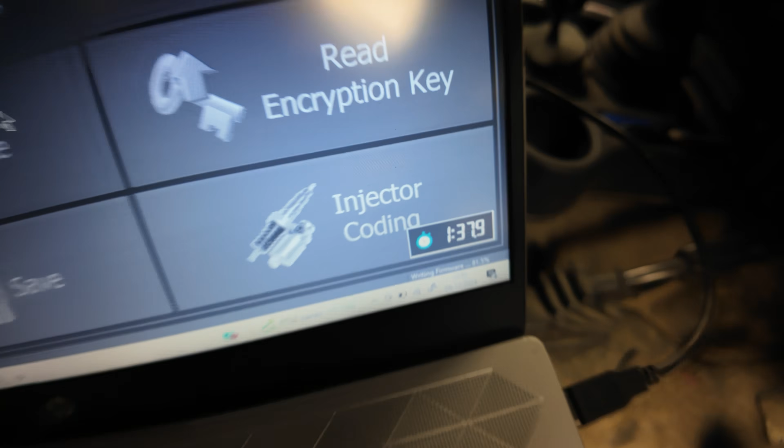Shuts like a Defender. Windy windows.

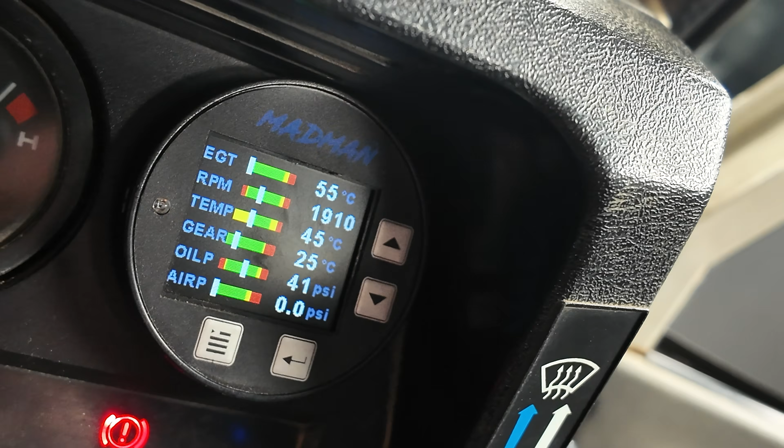Works quite well, but not quite as well as an Alive Power Flash.

So let's have a look at the vehicle, just having a look for some codes. Nothing in there that's going to give us any bother.

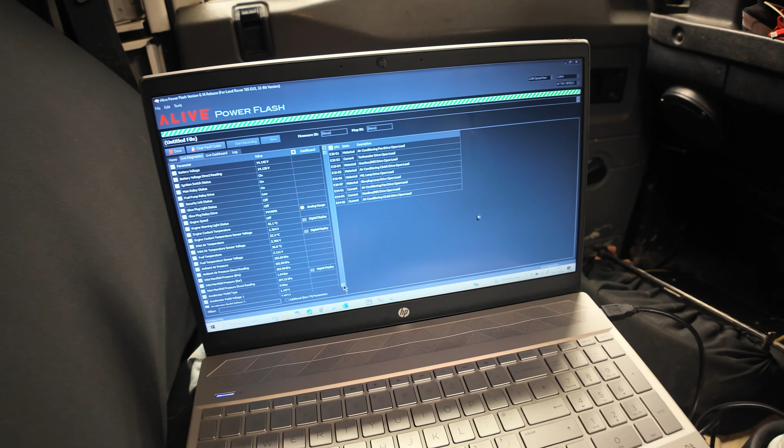What data are we going to look at today? Engine RPM, coolant, air inlet, manifold. I've already checked this - the map sensor's good, so we're just going to look at that data.

So we'll go straight to the live dashboard, and there we are. Look.

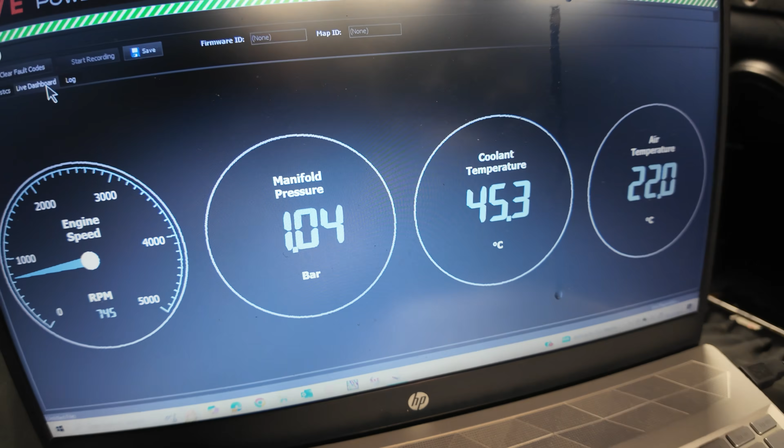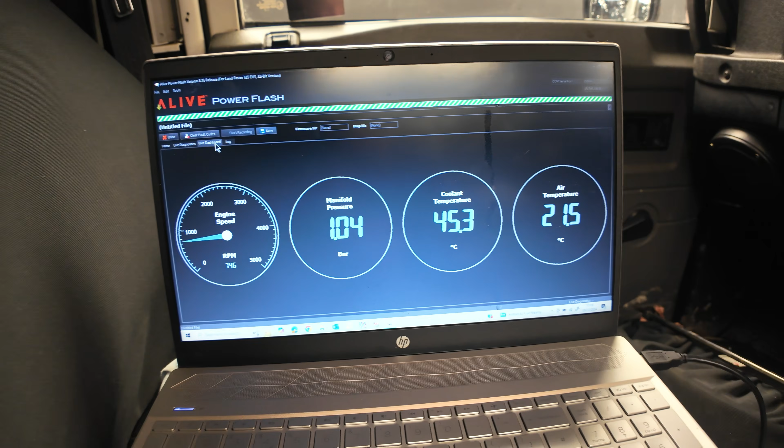I'll put some temperature into this one because it's a little bit cold at the minute, and then we'll get on with some power testing. We'll see what it makes with the old stage one done about 3 years ago. Yeah, never went on the dyno back then, but we're upgrading today - we're going for some more power. So let's see what we can do.

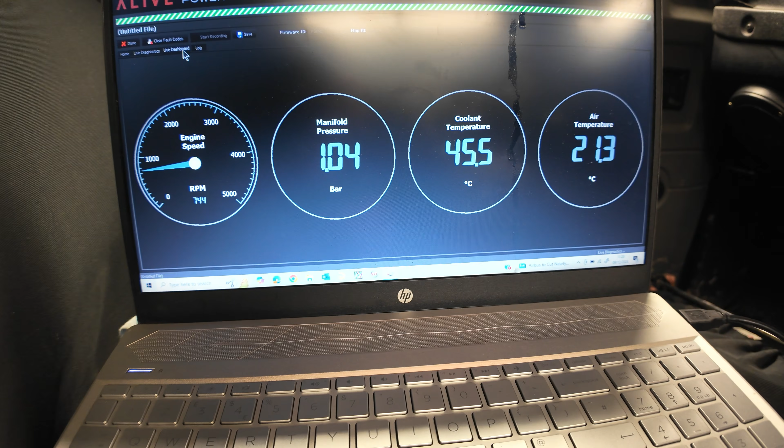Just take the brakes off the dyno, have a look at the wheels, make sure they turn.

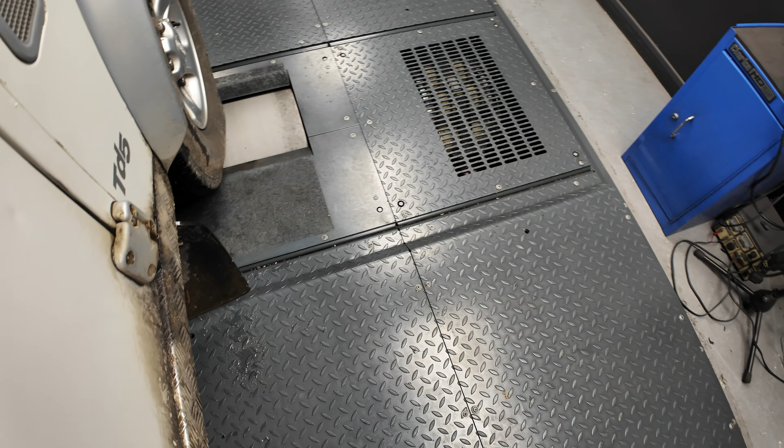I do like to check the straps after the vehicle's moved a little bit. Yeah, this back one here wants a little bit of a tightening.

Feels like a stage one.

It's actually quite smooth on the dyno, this one. Quite smooth, yes. Look, almost no vibration from the steering wheel. Steering wheel's not straight, but yeah.

Right, so we're up to temperature now with the engine and we're ready to do a power test. So we've got the fan on, fan's going, so let's see what this can do.

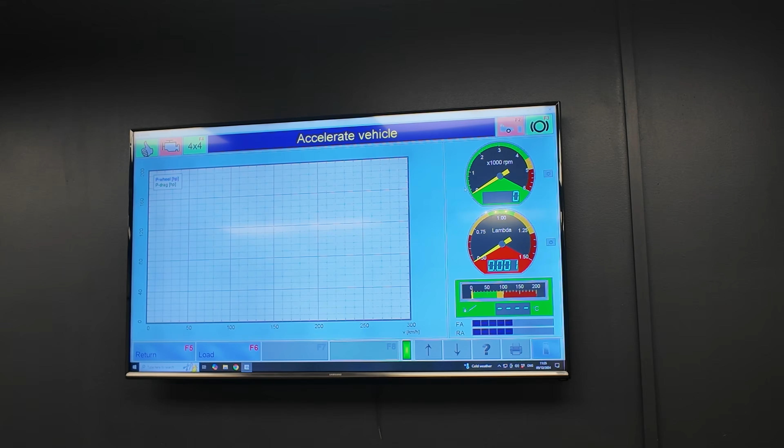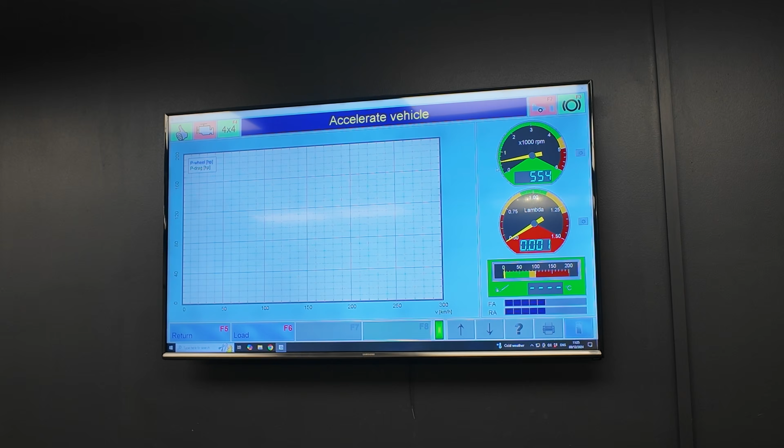So remembering it's stage one mapping, but it's got the mods for stage 3, so let's see what it'll do. Off we go.

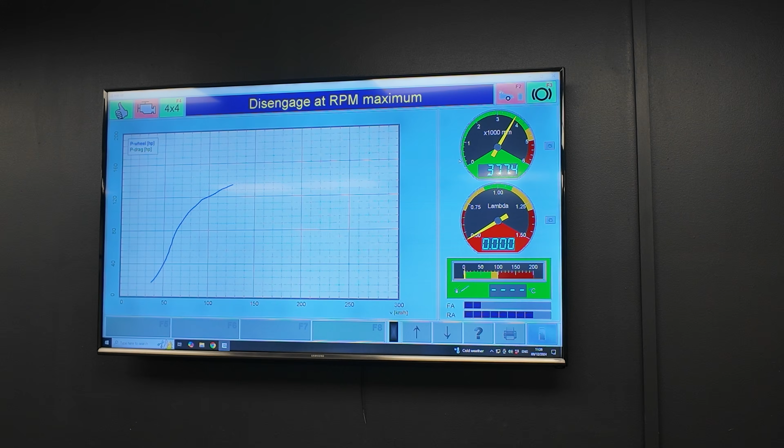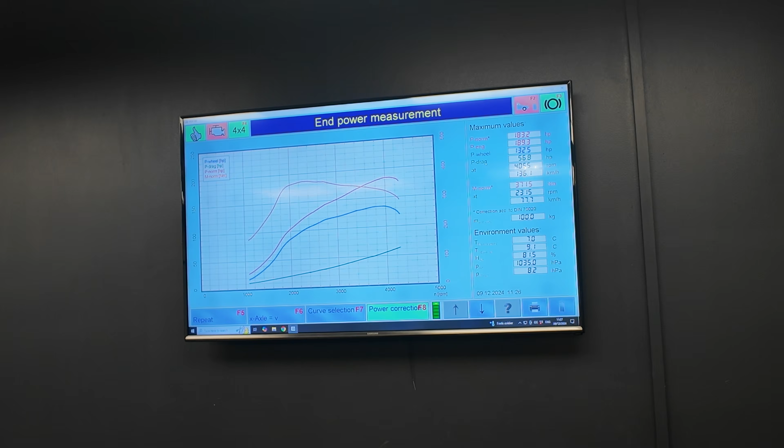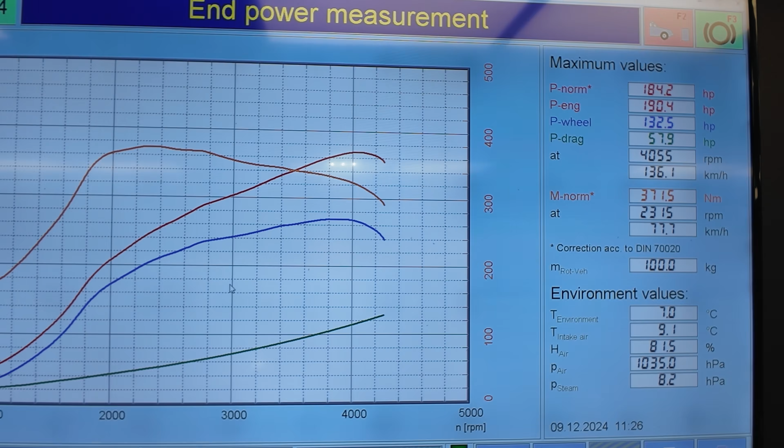So, oh, we need to make a correction to the rundown. So there's your stage 1. Well, that is a very strong stage 1. Intercooler obviously doing an awful lot of the lifting there. Definitely doing a lot of the lifting.

So we'll press on with some more mapping. I've got a feeling this is going to be a very strong result when we are done on a stock turbo.

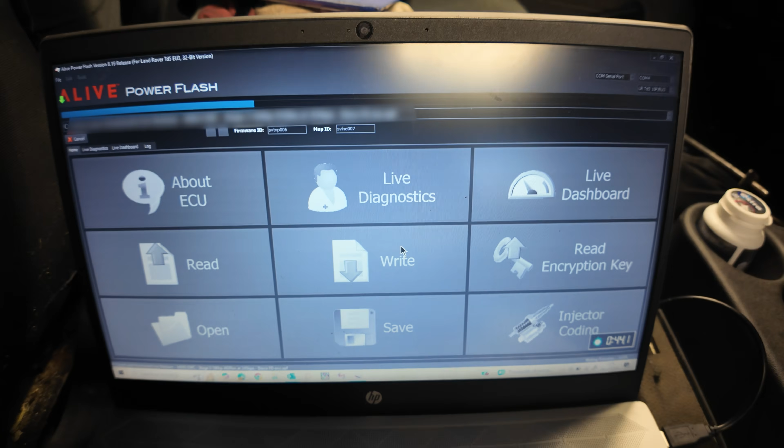Right, so we have the map going on now, and also got something else here. What's this? Yeah, a new Alive tuning product to work alongside the Alive Power Flash. Get this map flashed and we'll show you a bit more about this.

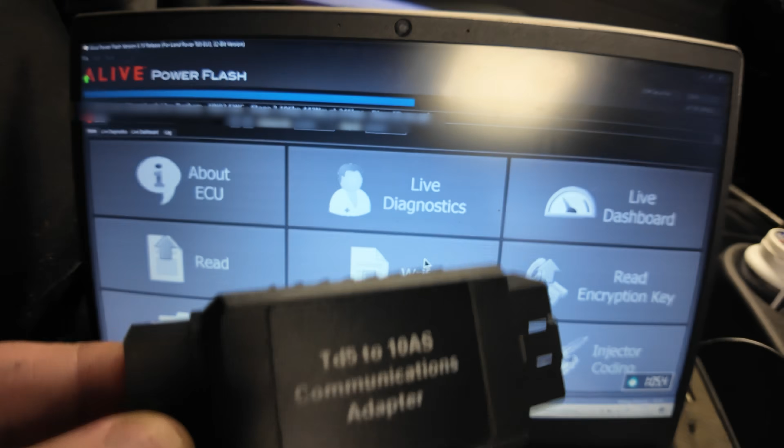Right, so Power Flash is already plugged in. What we would do from here is try and look at the screen without getting a reflection. Yes, so...

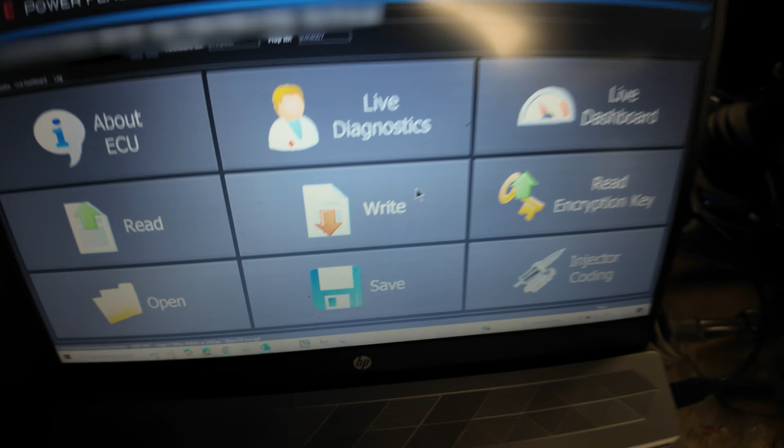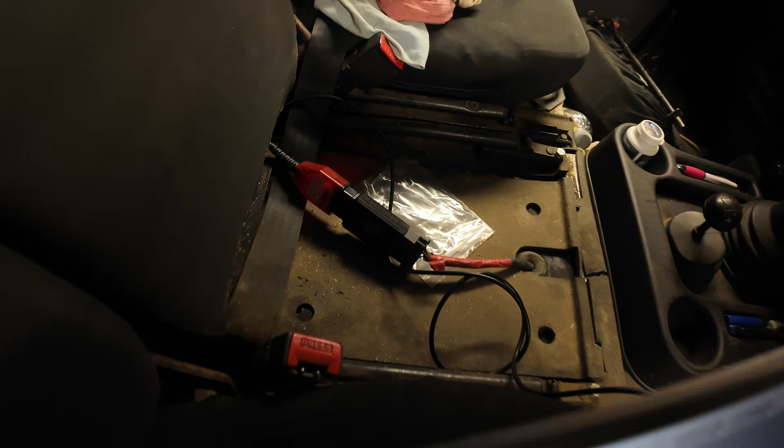10AS, here we go, let's read the 10AS. So this is a new product we've got on the market, which is probably just about - by the time this video goes out - on the website, the Alive Tuning website, it will connect to, as you can see, the Alive Power Flash, and it will allow you to do modifications to the 10AS. So just reading that, as you can see at the moment, and then you've got the option to do lots of different things, make changes yourself, so yes, on a Td5 Defender. So there's some information straight away.

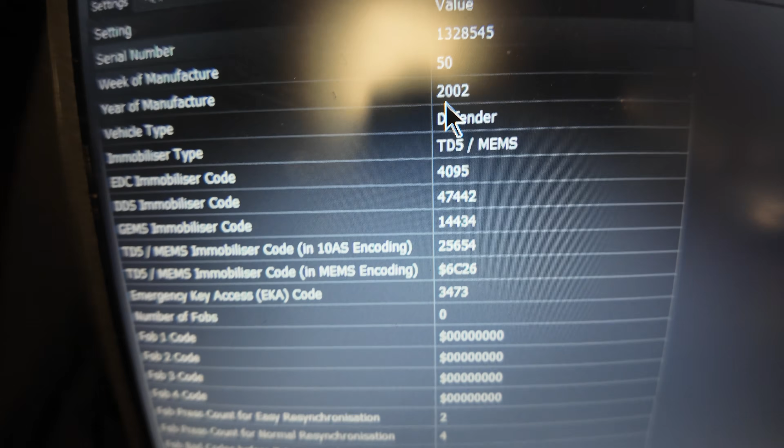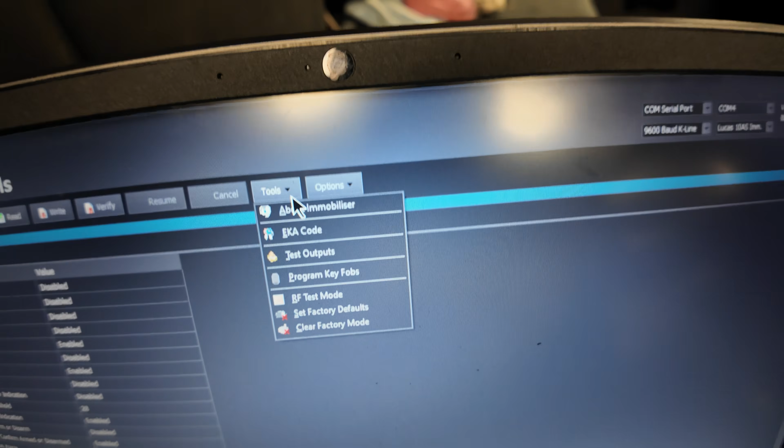Already we've got some details on the 10AS. As you can see, I cycle through, there's so much information on there, and you can make changes to this and write it. We do recommend that before you do anything, you save a copy of what you do in case you make a mistake and you want to go back. So underneath the tools, you can look at all of the information available.

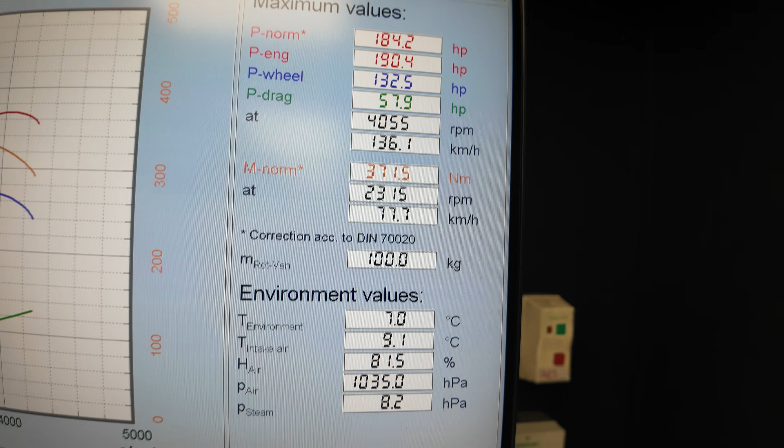Right, let's go back to the job, which is the 90, let's have a look. It made some really good power for just a stage 1. We don't usually see that for a stage 1, but this has an Alive Ultimate Intercooler and a free flowing exhaust, a sports exhaust we'll call it.

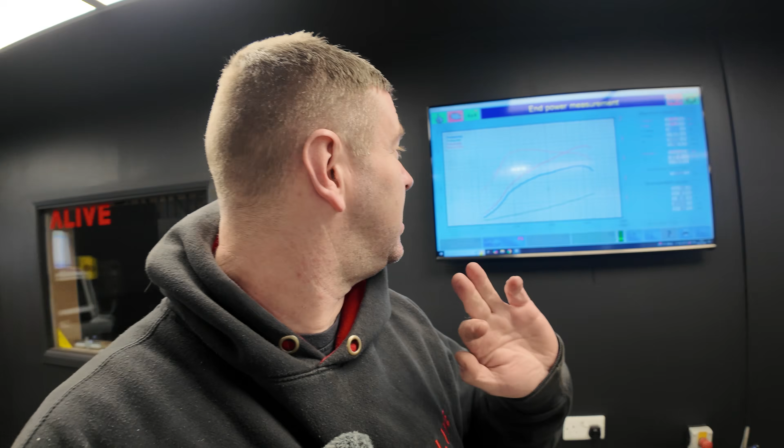I've already reflashed the map, so we expect to see about 195 horsepower maybe now, 420 newtons of torque. We'll see what it makes. We'll show you, we'll come along for the ride.

So what we'll do is we'll just put a little bit more temperature back into this 90. I'm just bringing up some data at the moment, some live diagnostics.

I'm actually using a new version of software for the Power Flash at the moment, and the refresh rate on the live data is a lot faster than usual.

Nice and cool intake temperatures as well. Obviously the Alive Ultimate Intercooler is really good at doing what it does, and it cools, what does it do? It cools your turbo charge down.

Just watching the coolant temperature come up a bit more, and we'll do a run.

In the background on the dyno graph, which I will show once I've done a run, will be what the car came in with, what it made with our stage 1, a very strong stage 1. But like I said, the intercooler is doing a bit of lifting there, meaning it's a very efficient piece of kit, and if you fit one of these Ultimate Intercoolers to a Defender with a standard map, it will make a little bit more power and torque.

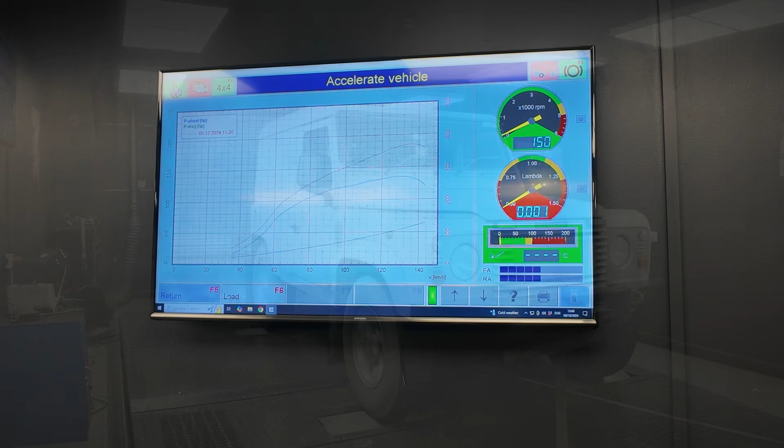Right, so here goes our first run with the new map.

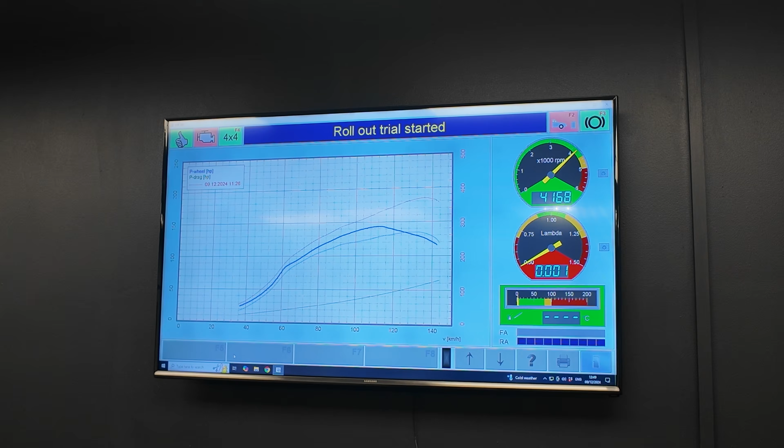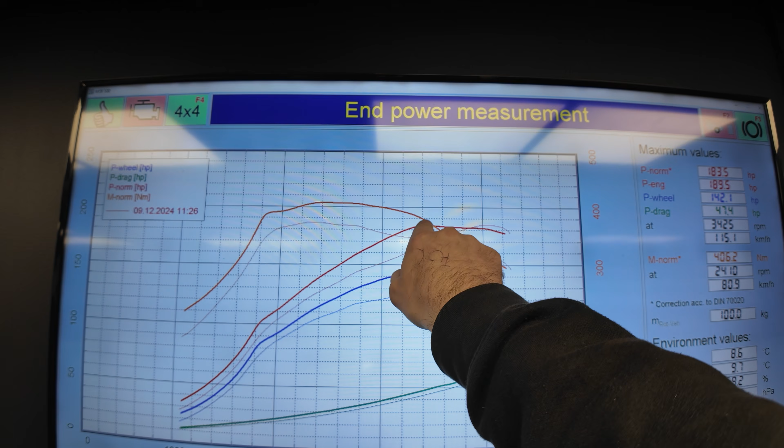Wow, that is certainly an interesting result. Definitely an interesting result at the top of the graph there. We made a little bit less power, more torque, definitely stronger throughout the range there, but what's going on here? I'll have a look at the log.

We might need to make a revision to the map. Let's see what we can do.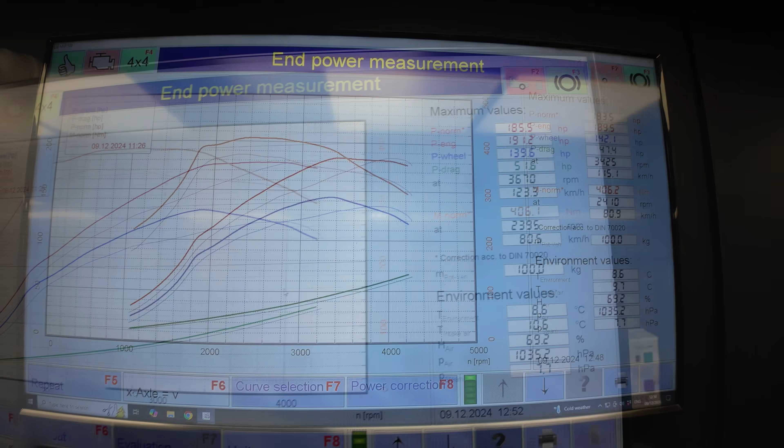Right, so after another run and an adjustment to the mapping, we've got back the power that we did have, and we're going to, excuse the WD-40, make another adjustment to the mapping.

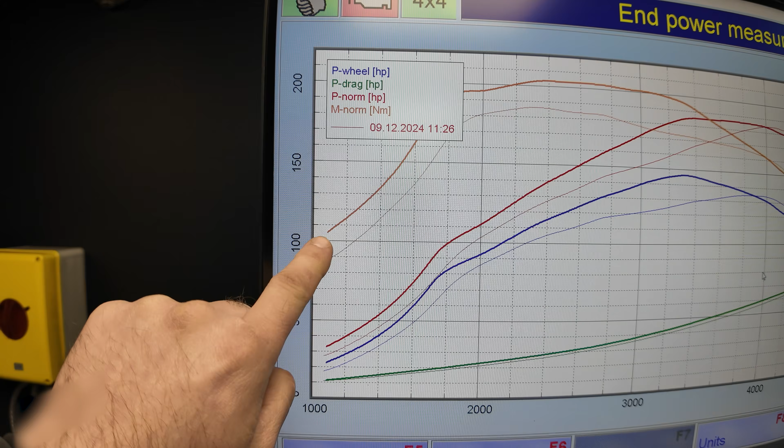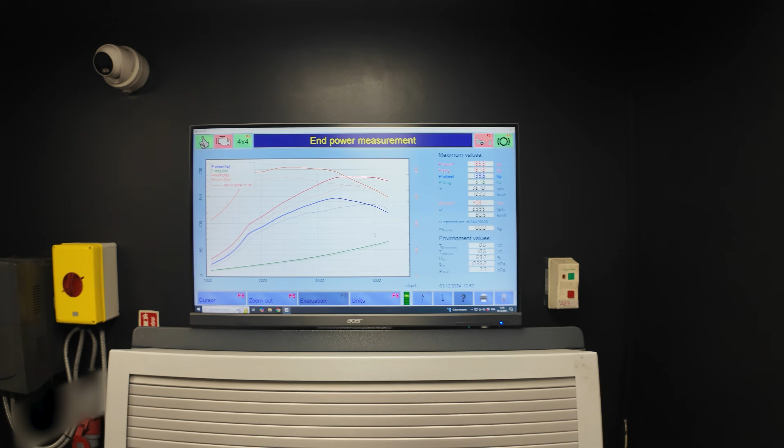We're gaining a phenomenal amount of torque throughout the whole range, so much stronger. Just want to find perhaps a little bit more up top there, just so it carries on revving out, not an awful lot, but just enough to stop it from feeling flat at the top.

But yeah, going well, this one. It is a working vehicle, like I say.

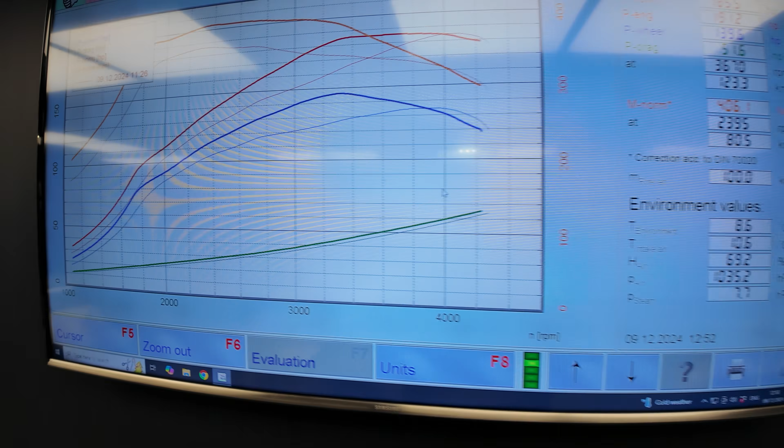Both the customer and I are very surprised with the initial 185 horsepower, well, 184 horsepower first dyno pull, which for a stage one, this curve here, the red one, is really, really good. Done back when we opened back up just after COVID, one of our first customers that came back to us.

It's that time of day where we're partway through the job, and what we like to do is say what's in the workshop. We've got a very poorly Mini in for a head gasket repair, you all know whose this belongs to.

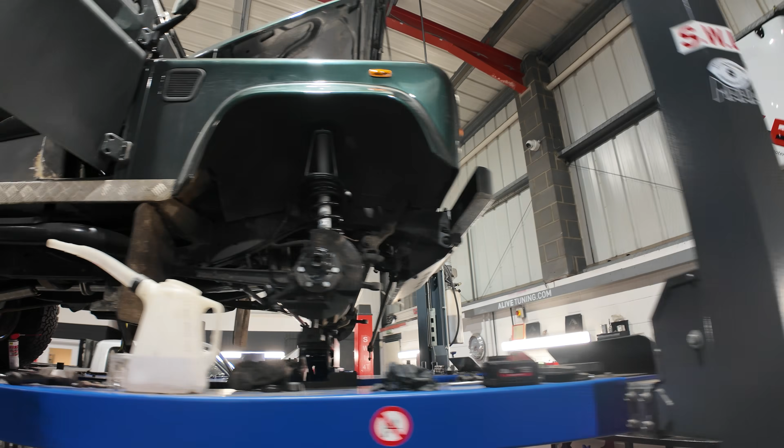We've got Des having some winter preparation, so Martin's racing series has finished for the year now. We've got Will on with this little 90, and yeah, he's been pretty busy with this suspension, GTB 450, so this one will be on the channel a little later on.

Just turn the radio down. We've got Brom on with a clutch in this one, I think, I'm sure it's in for a clutch. Busy shop today, there's a couple of jobs outside as well, and those are for me later this afternoon.

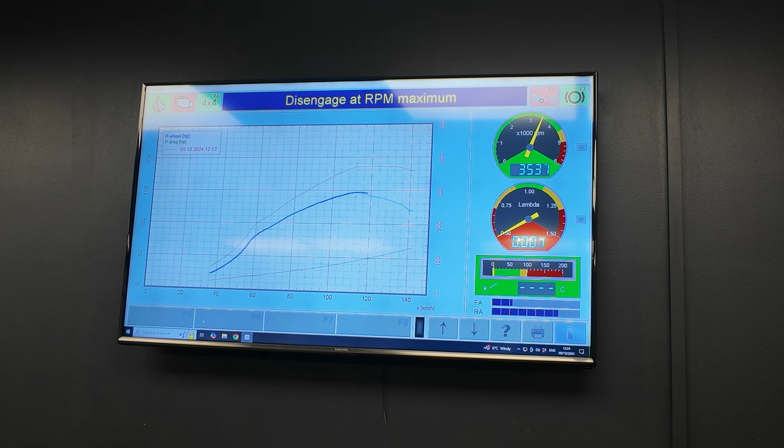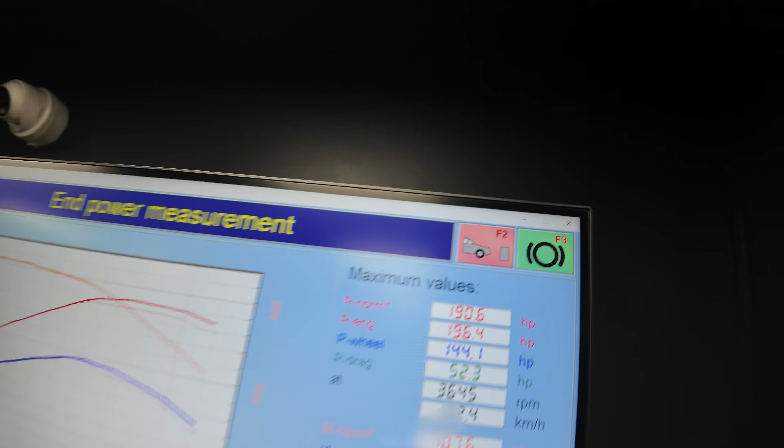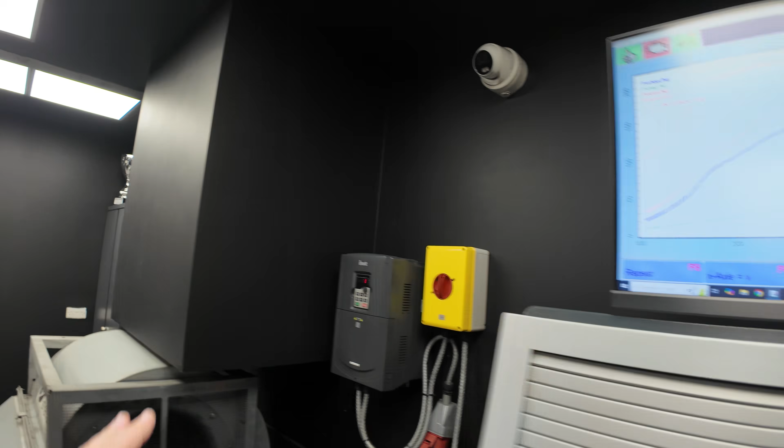Right, that is starting to look more like it. The mapping we've just done here was happy with the bottom end of the rev range. What we wanted to do was just stop the power from flattening off a little bit, so not getting a massive amount of power. The customer with this one isn't looking to make massive power, just a good amount, usable, safe and clean. So yes, quite happy with what we've done here.

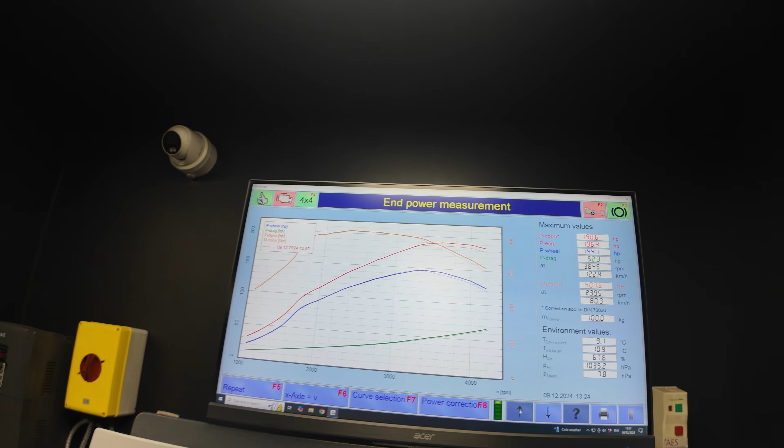I am going to try one more revision to the map, to see whether it will make it better or worse. We'll figure that one out, but the results so far are looking good.

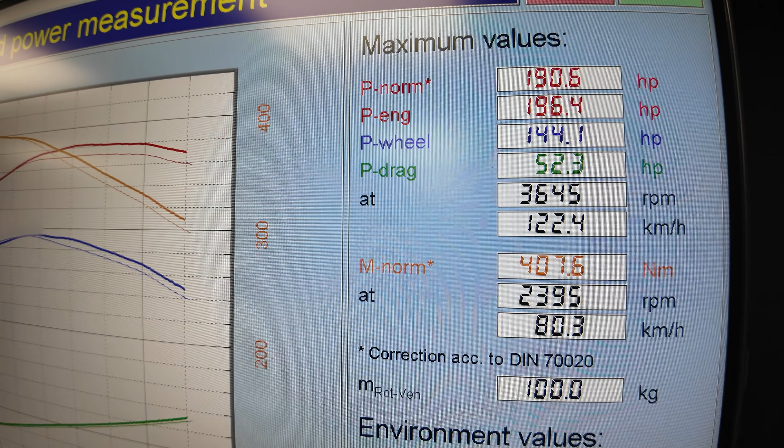Again, on a stock Td5 turbo, running 1.4 bar of boost for those that are interested. So not too much, nothing stupid, nothing over the top, nothing that's weak - a good amount of boost, but within the capability of a stock Td5 turbo. We've run them a bit harder before, but this is a working truck, so proving that we're doing tuning to suit the customer's application, custom tuning to suit your needs.

Let's get on with that other revision. Let's try this, one more revision to the mapping to see if it will be better or worse. Will it smoke more? Will it smoke less? Will it make more or less power? Let's find out.

No different, but interestingly, a bit of smoke. And if you just heard a beeping, that was the Madman alarm going off as we reached 750 C exhaust temperature.

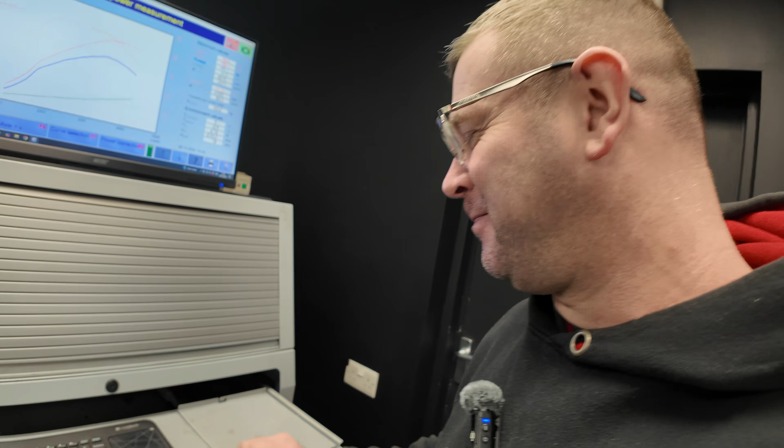Anyway, right, let's do another run. We'll repeat that, load the background, our best run, and off we go. You can come with me. Let's follow Stu for the day.

Right, this door shuts like a Defender. I said that in the last video. Right, start it up. Yep.

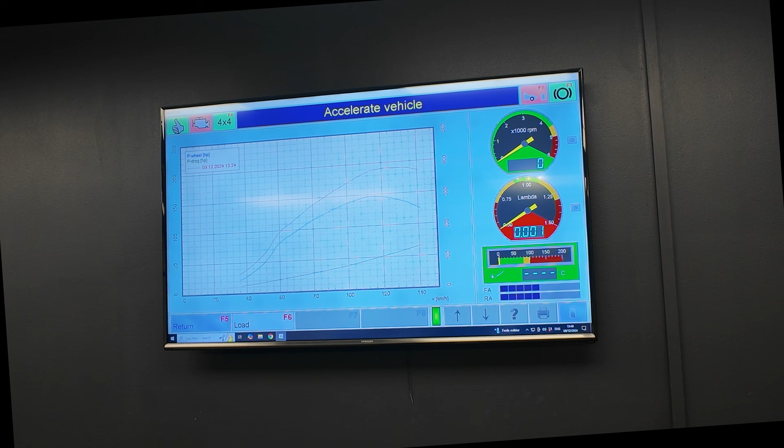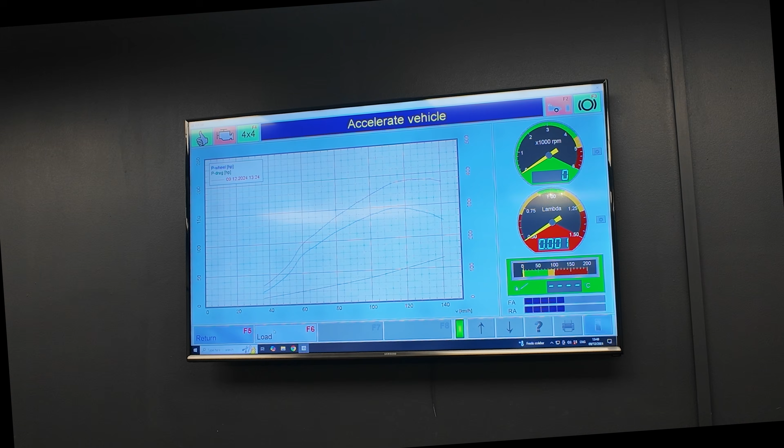So in case it wasn't clear enough, that last revision I did was off camera and it smoked a bit. We are inside a building, there's no air travelling down the side of the car. I thought, I don't really like that, there's too much smoke, and I hadn't turned the exhaust extractor on, so before I flash back to a previous map or make any big decisions, we'll try another run.

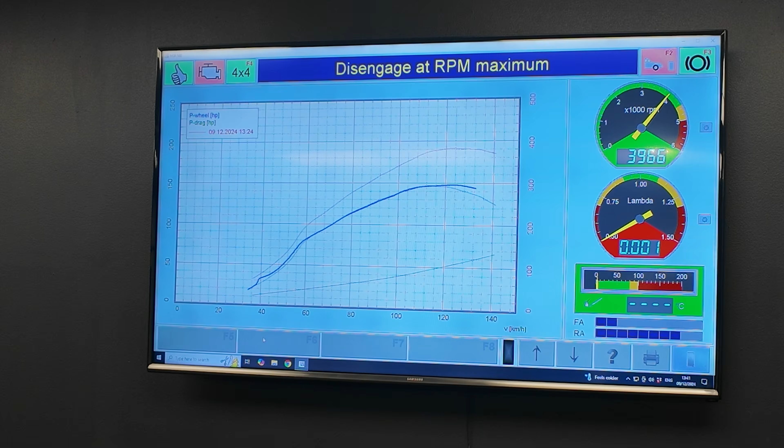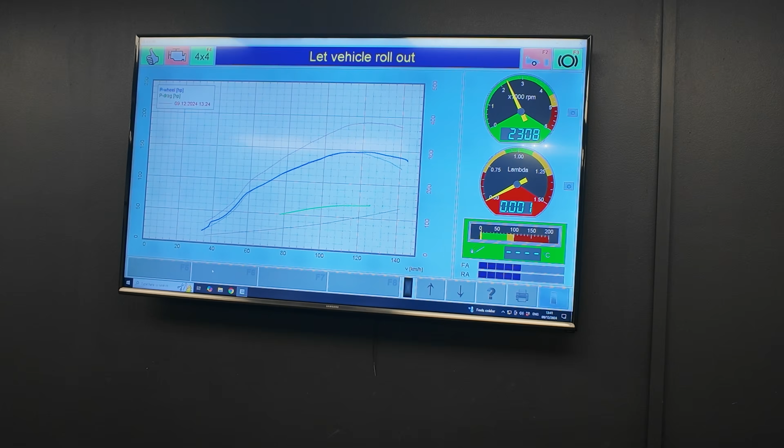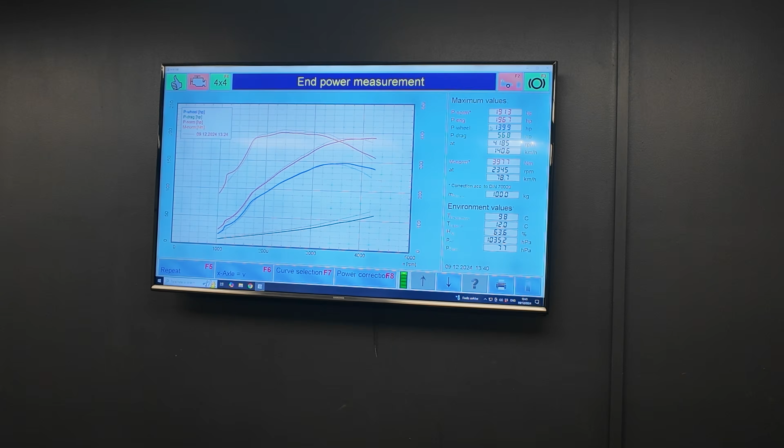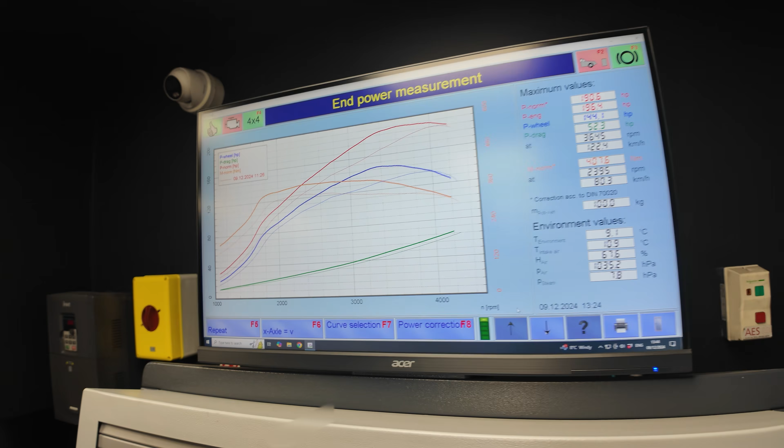Right then, so we've got the finished results, and this is what we're looking at: 190 horsepower, 407 newton meters. So good power and torque.

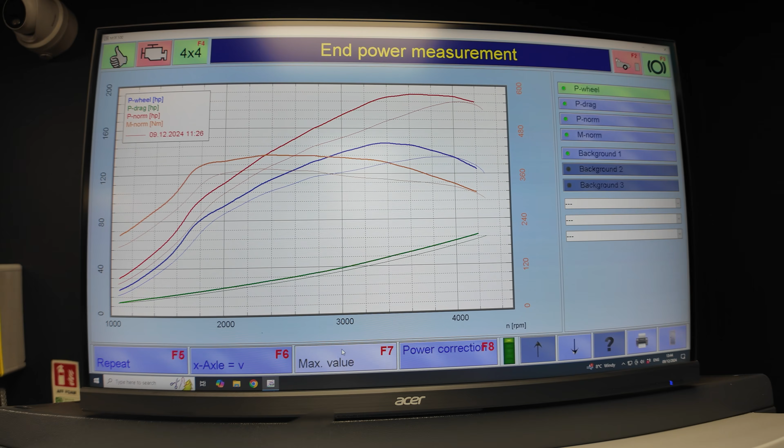What we're looking at here, I'll just simplify the graph a little bit, move the drag, the wheel, and we'll remove the brake horsepower as well, so we're just looking at torque at the moment. With a diesel vehicle, normally you're going to be looking at torque, gains in torque.

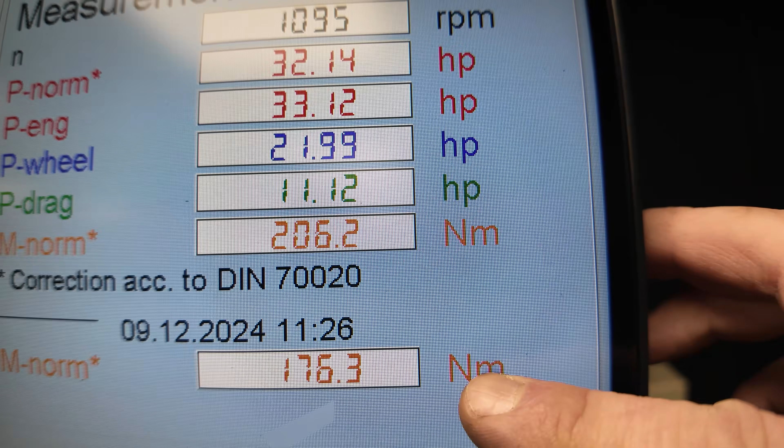So right from the moment we do a power test, right at 1000 RPM, you've got gains of torque straight away. I'll put the cursor on there so we can see how much torque we gain at the bottom of the RPM as soon as we start the pull. So we're looking at a decent gain - you've got what it makes now with the current mapping versus what it did make when it came in. A good little gain there.

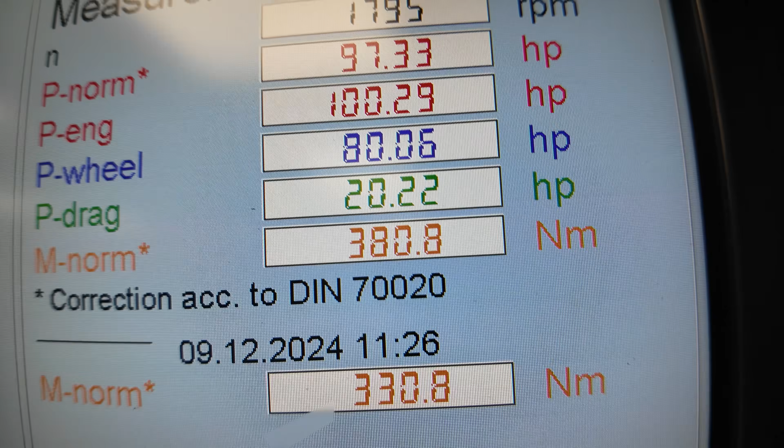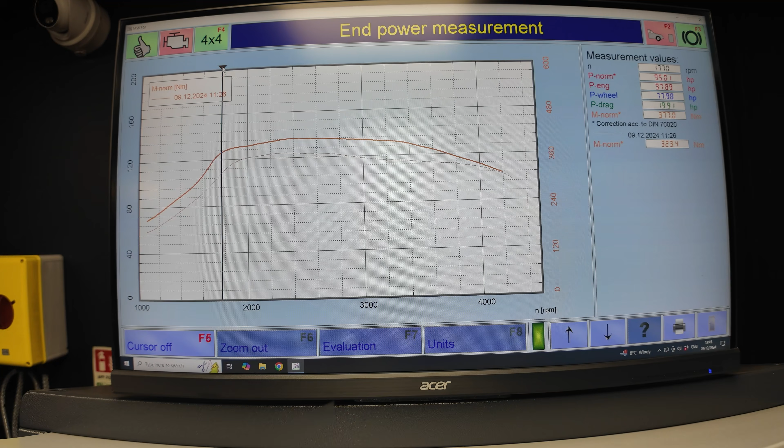And as you rev the vehicle out, let's pick 1800 RPM, so you've got 50 Newton meters more. That's going from stage 1 to, it's kind of stage 2/3, somewhere in between. We're not trying to rinse this one for every last bit of power it's got, but yeah, definitely good gains. Peak torque wise, you've got sort of 30, 40 Newton meters of torque, best part of.

The most important thing is, as you rev it out, it makes a lot more torque, another 50 Newton meters right at the top there. So it's going to feel stronger the more you rev this one out. Now this one is a working vehicle, it does a lot of towing, so having a wider band of torque is going to make life a lot easier for the driver.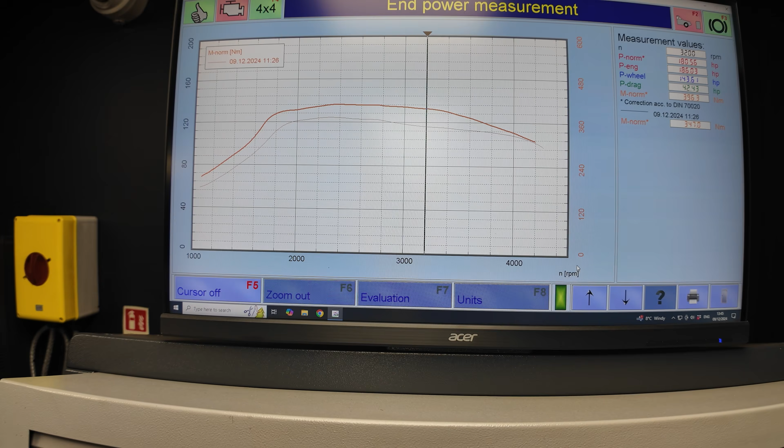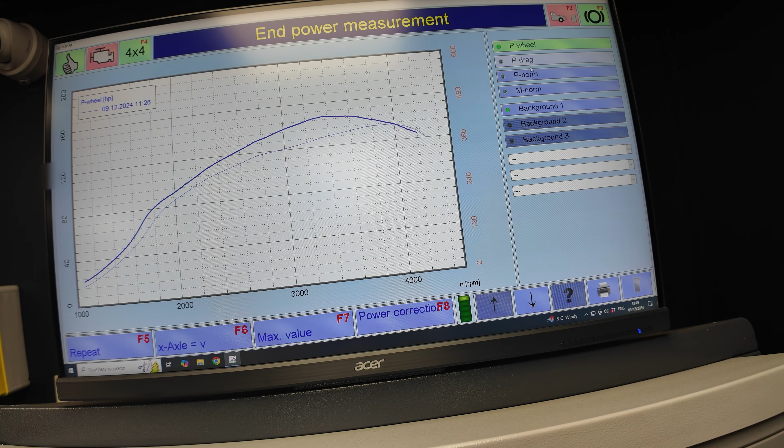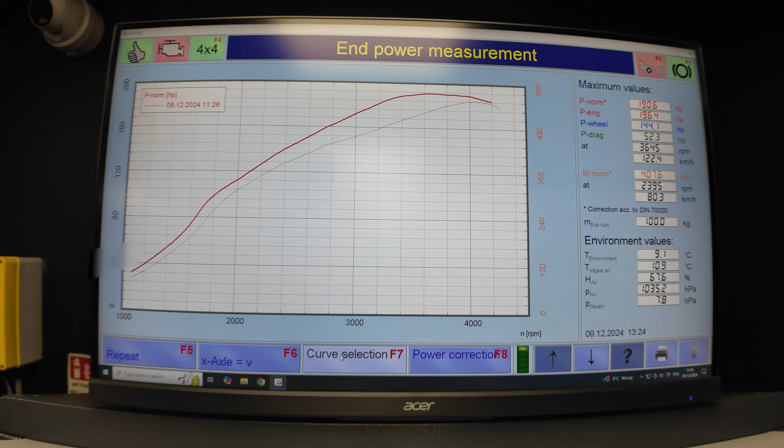Let's take the cursor off there and look at the horsepower to see what we've done. Oh, that's power at the wheels. So engine horsepower, we're gaining absolutely everywhere, and we're a similar amount at the top. But most interestingly, to get the 190 brake, you don't have to rev it right out to the top, it's much sooner. 3,500 RPM is where you're finding 190 horsepower.

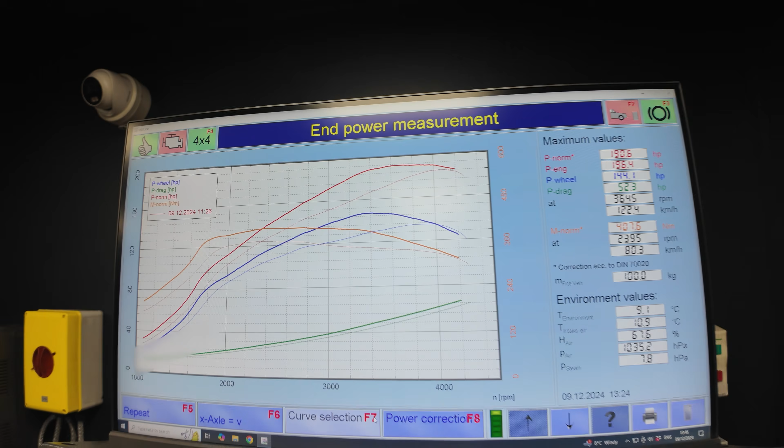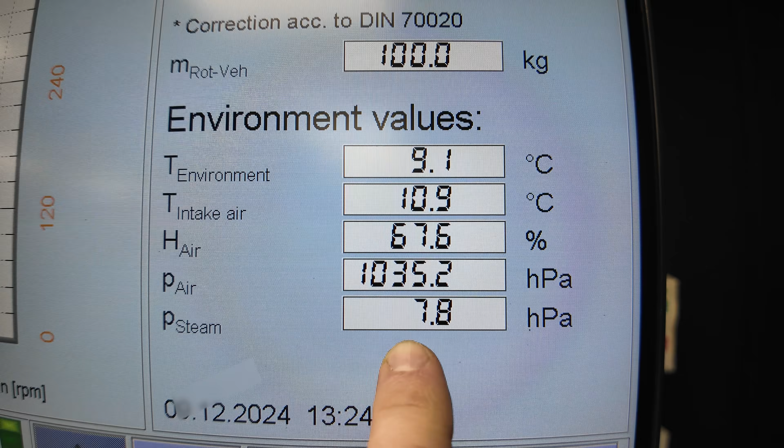So good gains throughout. Let's bring all that information back on the screen again. If you're new to the channel and not sure about this, you've got your drag, your power at the wheels is the blue, the orange is the torque, and the red is the engine horsepower. Some of you might be seeing 196 here - this would be for those not using the environment calculation. We use the environment, so we make a calculation to adapt for humidity, air pressure, environment temperatures etc. We have a weather station on our dyno.

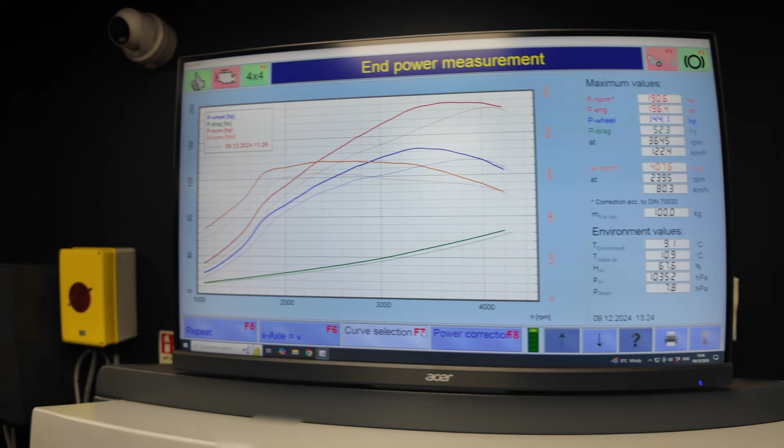Shall we have a look outside the workshop as well? What have we got? This one, very interesting one, all the way from Dubai. Yes, be rude not to feature this one when we're done. Tuning, diagnostics, some work on the brakes, some general repairs. Fitted a clutch to this one and a refurbished transfer box. Our 90, our 320 brake horsepower 90 - you'd never believe it, would you? And 110.

And our Freelander as well, so HQ live tuning. Wind-up windows - it's funny, because a customer is just asking what he needs to do to fit electric windows in his 90 that has manual windows. Little plug for Pace Automotive, I believe they do a loom and an adapter kit.

So we're just going for a road test now just to make sure that this drives nice, boosts well, fuel's okay, and everything's okay before we hand it over to the customer. It is pretty much one of the most miserable days in Louth today, it is freezing cold.